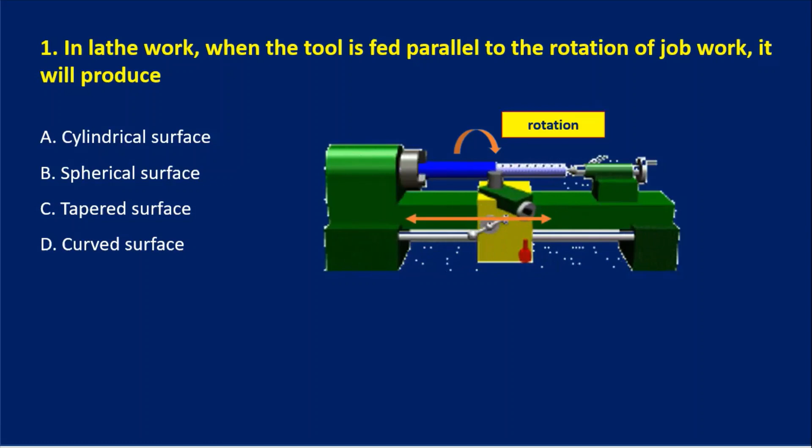Our first question: in lathe work, when the tool is fed parallel to the rotation of the job, it will produce what? If you see in this diagram, the tool is fed parallel to the rotation of a job, and in that case it will produce a cylindrical surface. So our answer is A, cylindrical surface.

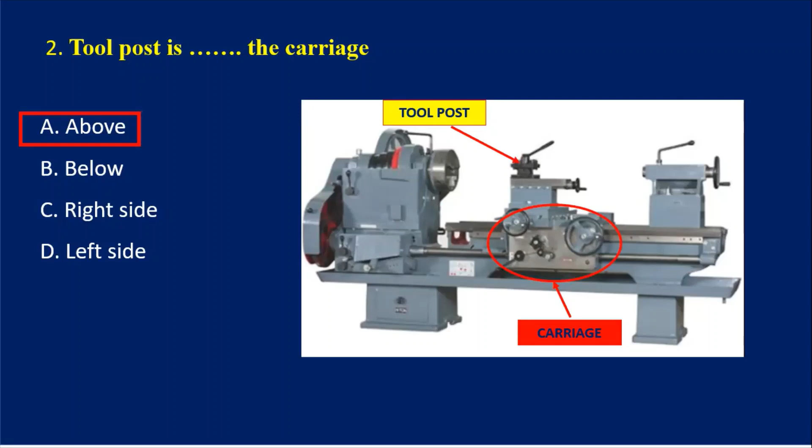Next question: tool post is dash the carriage. I show the lathe machine. From this diagram it is clear that the tool post is mounted over the carriage, meaning it is mounted above the carriage. So our answer is A, above.

Third question: workpiece is held in dash. I showed the first diagram, the three-jaw chuck. In a three-jaw chuck we mostly mount cylindrical components, while in a four-jaw chuck we mount or locate components other than cylindrical ones. This means that in the chuck we can hold a workpiece. So our answer is A, chuck.

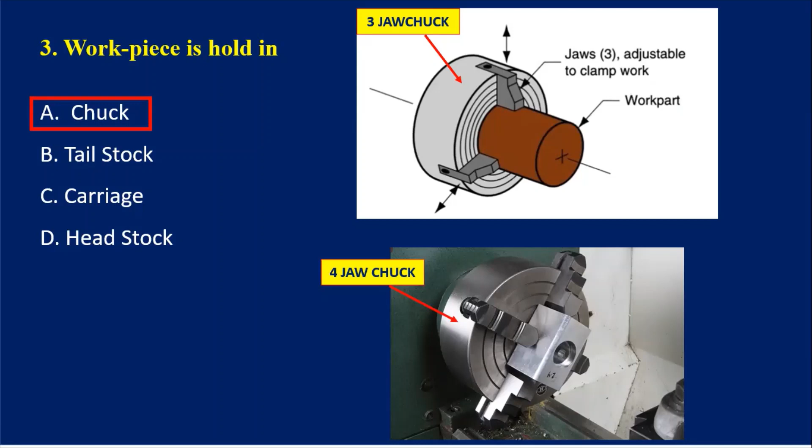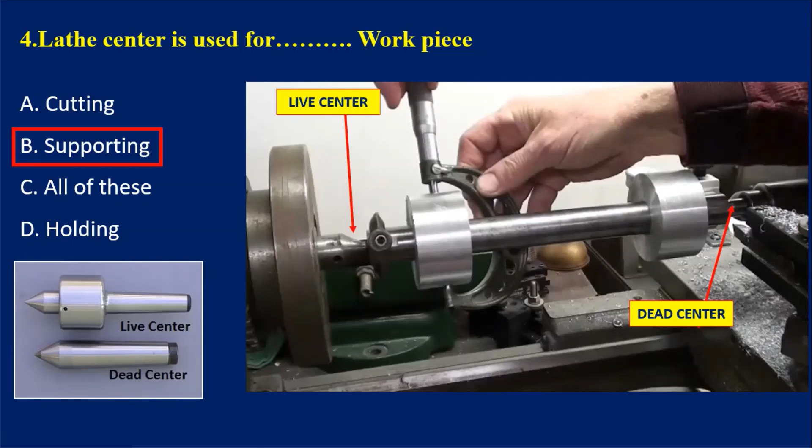Fourth question: lathe center is used for dash workpiece. As we know, there is a live center and a dead center. The live center is on the headstock and the dead center is on the tailstock. In this case, the workpiece is supported, basically the long workpiece is supported between the live and dead center. So our answer is B, the lathe center is used for supporting the workpiece.

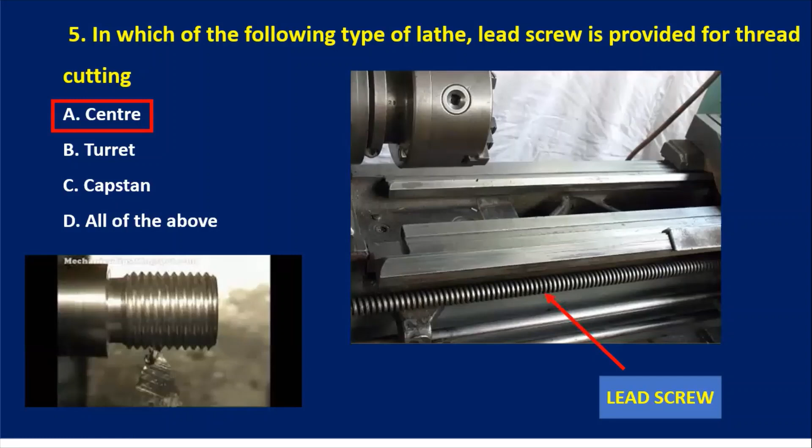Fifth question: in which of the following types of lathe is a lead screw provided for thread cutting? This means a threading operation has to be produced on the lathe machine. For that, I've shown a center lathe machine, and in the center lathe a lead screw is provided for thread cutting. In the turret and capstan lathe there is no lead screw because threading is done using a tap and die. So our answer is A, center lathe.

Next: when the tool face is ground sloped from the nose towards the rear end, it is called dash. I've shown again a single point cutting tool. This is the nose and this is the rear end of the tool. The tool face is ground to slope from the nose to the rear end. So the answer is positive rake angle.

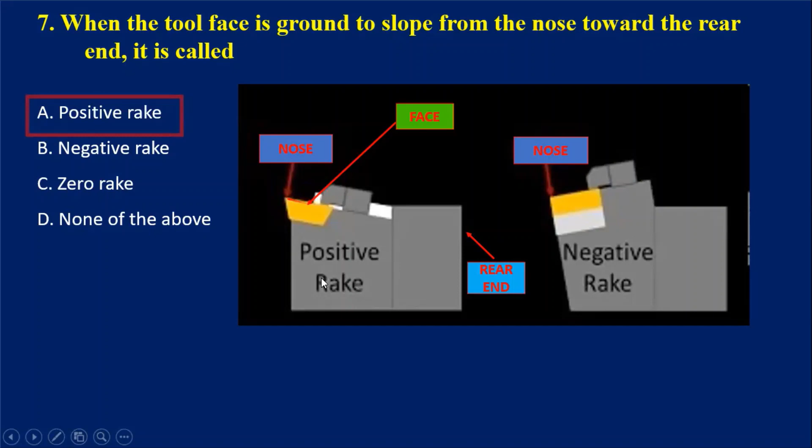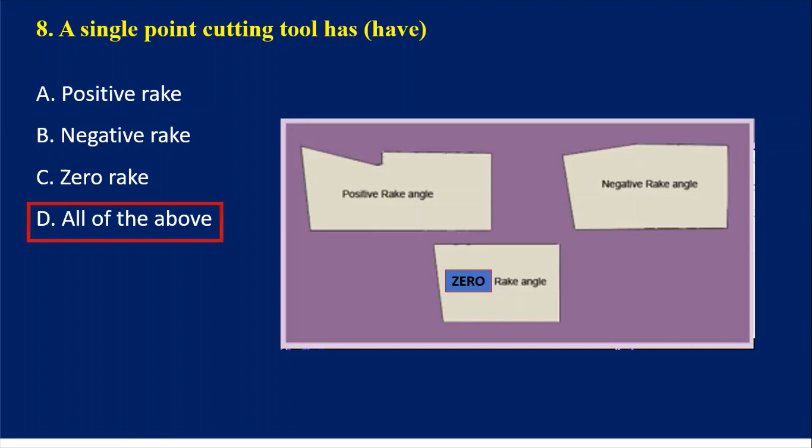Next question: a single point cutting tool has or have - you can see the three diagrams I've shown: positive rake angle, negative rake angle, and zero rake angle. This means a single point cutting tool can have all these rake angles, whether positive, negative, or zero. So our answer is all of the above.

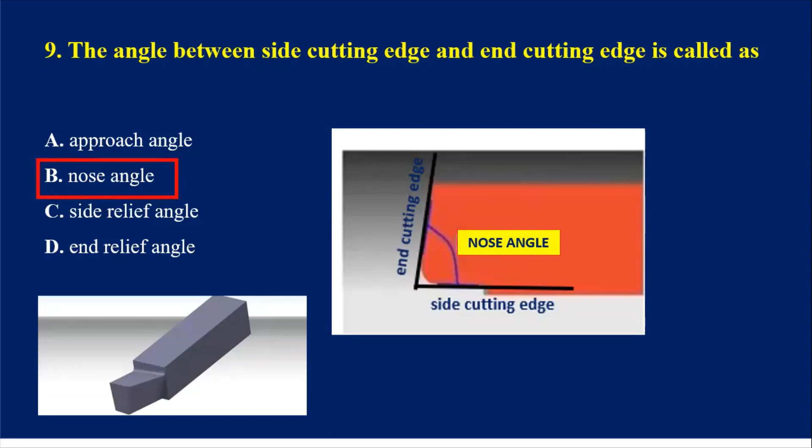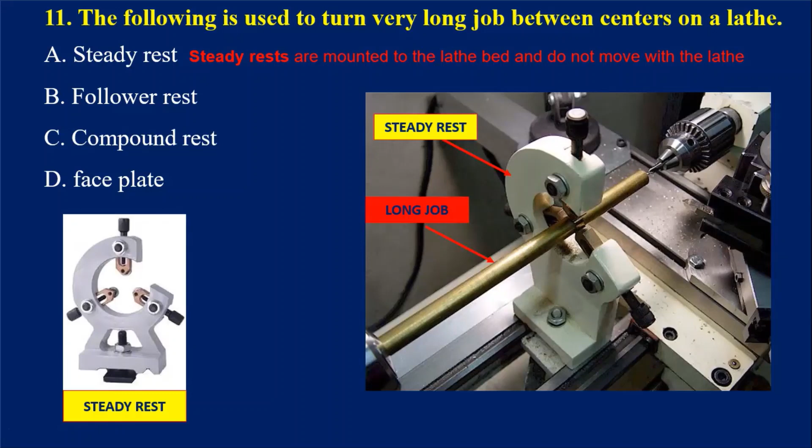Next: the following is used to turn a very long job between centers on a lathe. The answer is steady rest. This is a steady rest and this is a long job. This steady rest is mounted over the lathe bed and does not move along with the carriage. When the job is too long, the steady rest is used for supporting the job so that it can be turned easily between the centers. So our answer is steady rest.

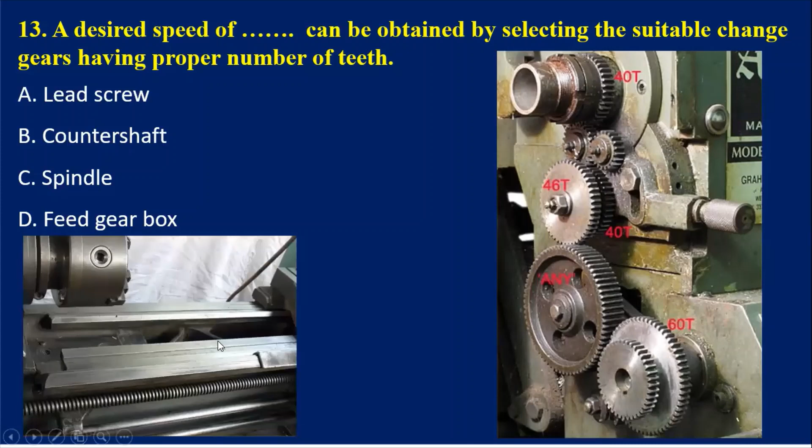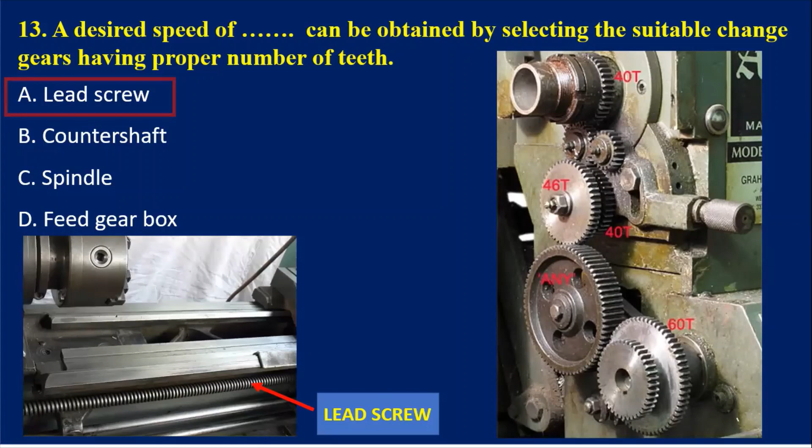A desired speed of dash can be obtained by selecting a suitable change gear having a proper number of teeth. This is the lead screw which I am showing in this diagram. We can change the speed of this lead screw by changing the gear which is located at the extreme end or extreme left side of the machine. Okay, so whatever speed we require can be changed by using the change gears, and for that our answer is the lead screw.

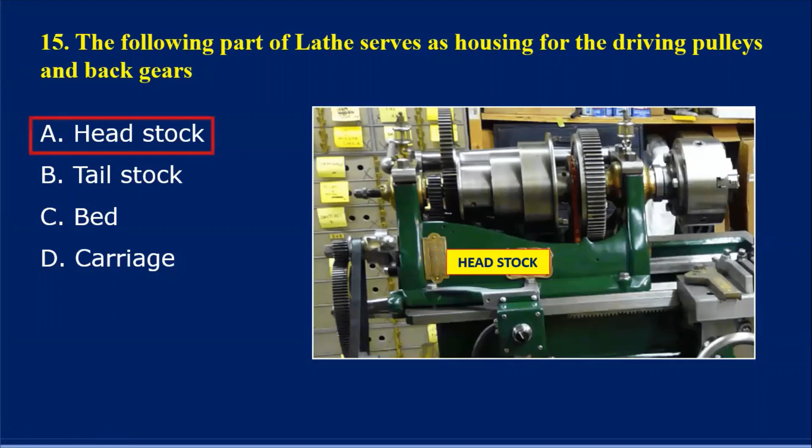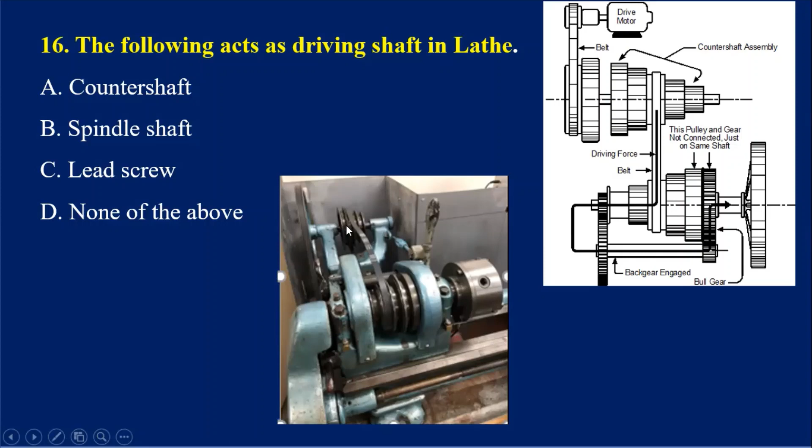Next, the following acts as driving shaft in lathe. Students, in a lathe machine, this is the counter shaft which will act as a driving shaft, and which is always parallel to the main spindle. And that's why our answer is the counter shaft.

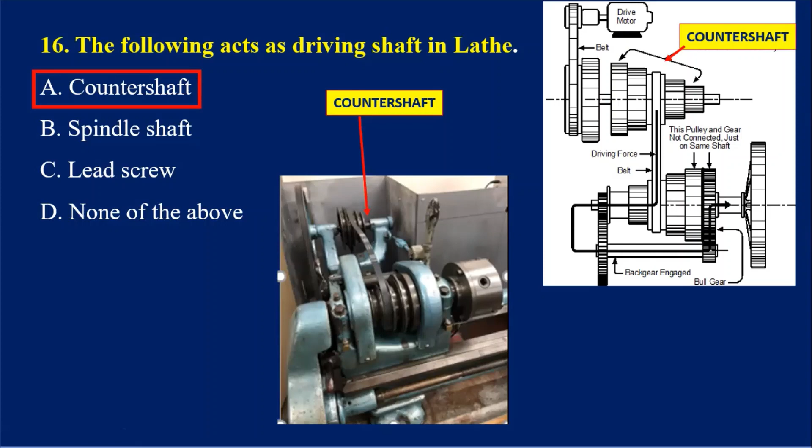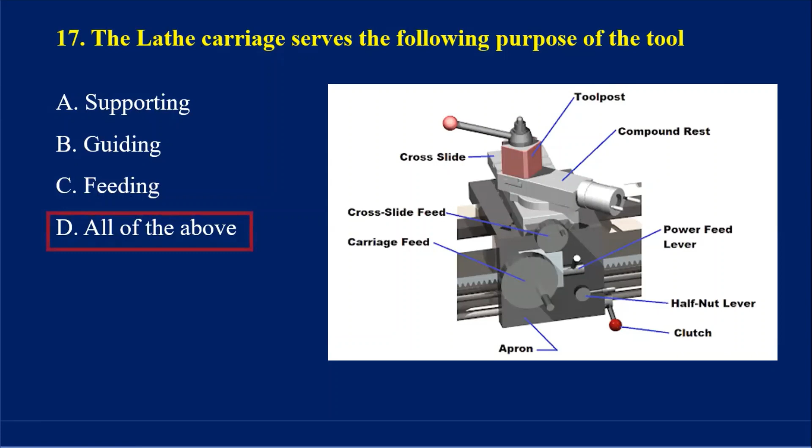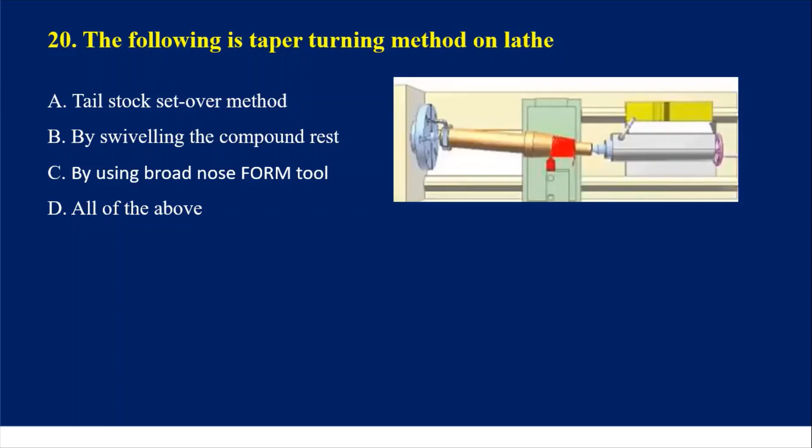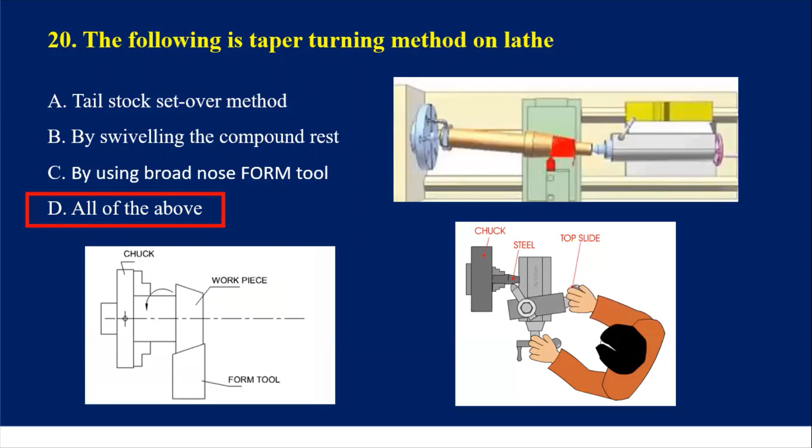The following is taper turning method on lathe. So students, this is the tail stock set over method, this is by swiveling the compound rest method. Then by using a broad nose form tool. It means that our answer is all of the above.

Next, in lathe, form tools are used to produce. Friends, if you see in this diagram, we can produce surfaces which are neither cylindrical nor taper. And that's why our answer will be B, the surface which is neither cylindrical nor taper. In that case, form tools are used.

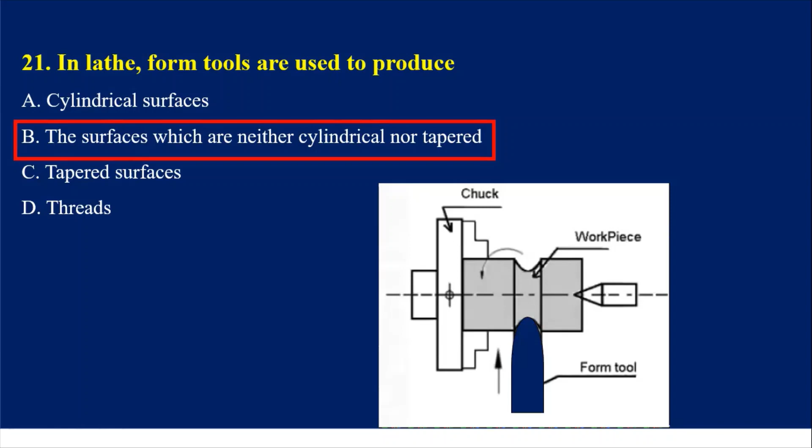A turret hexagonal tool post can accommodate dash tools. Here I have shown a hexagonal turret. Students, as you see, this is a top view of that. If the turret head is hexagonal, then I can locate 6 tools. If there is a square tool post, I can locate 4. So in this case, our answer is D, 6.

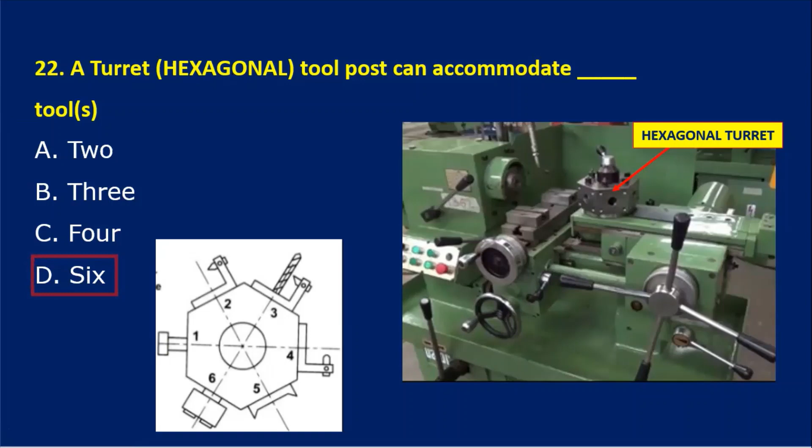Lathe bed is usually made up of. So you know that lathe bed is generally made up of cast iron to withstand the load of the headstock or a tailstock, carriage, etc. Also, the vibrations which are generated during the operations are damped out, and that's why our answer is C, cast iron.

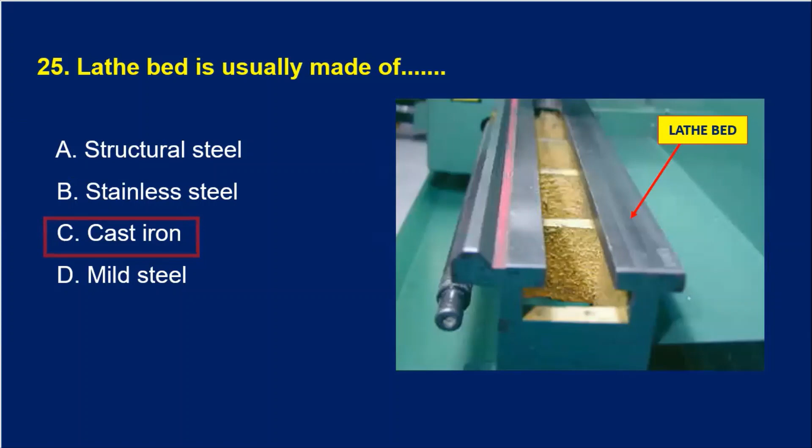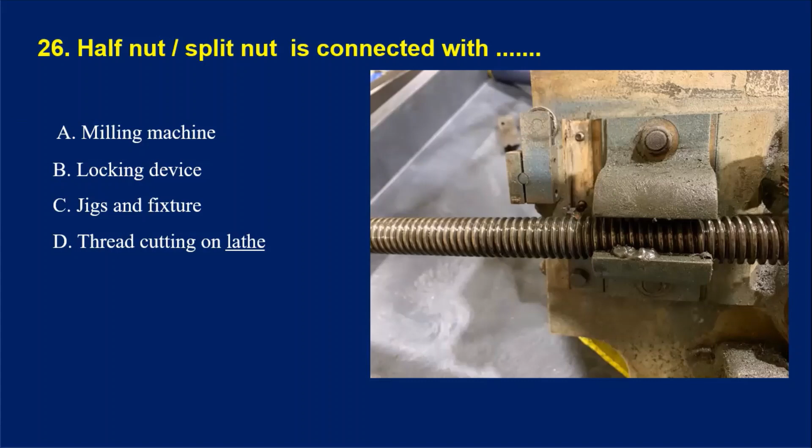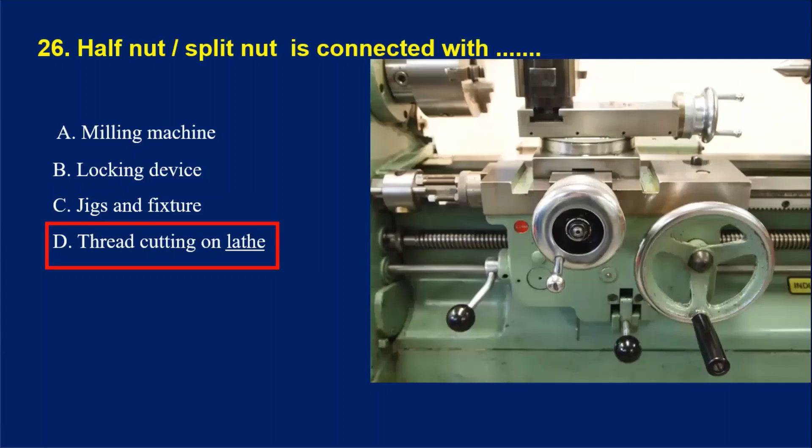Half nut or a split nut is connected with. So in this case, if you see this diagram, this is the half nut and this is the lead screw. So this half nut is used for thread cutting in a lathe. It engages or disengages the carriage with the lead screw, so that the rotation of the lead screw is used to transfer the tool along the workpiece to cut the threaded part. And that's why in this case, our answer is D, thread cutting on lathe.

Next question, in which of the following type of lathe very high skill of labor is required? Our answer is actually the center lathe, but I'll give an explanation of that. If I take the example of thread cutting, or if I compare the center lathe with the turret or a capstan lathe, the center lathe requires high skill as compared to the turret and capstan lathe, because thread cutting in the turret lathe is generally produced by taps and dies. So that's why our answer is the center lathe, where we require very high skill labor for doing any type of operation.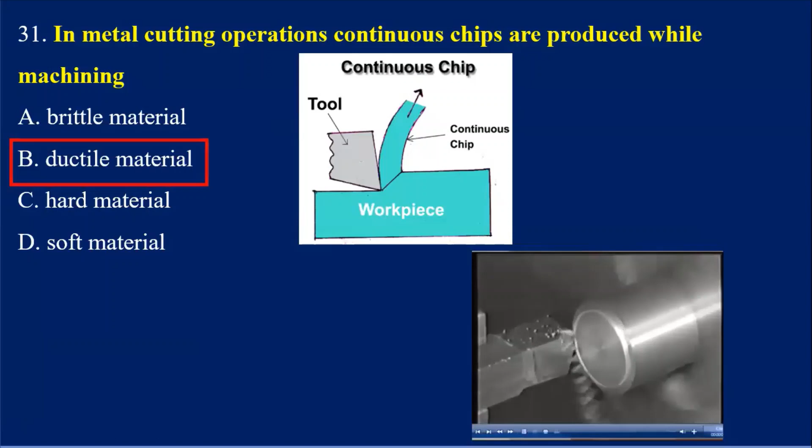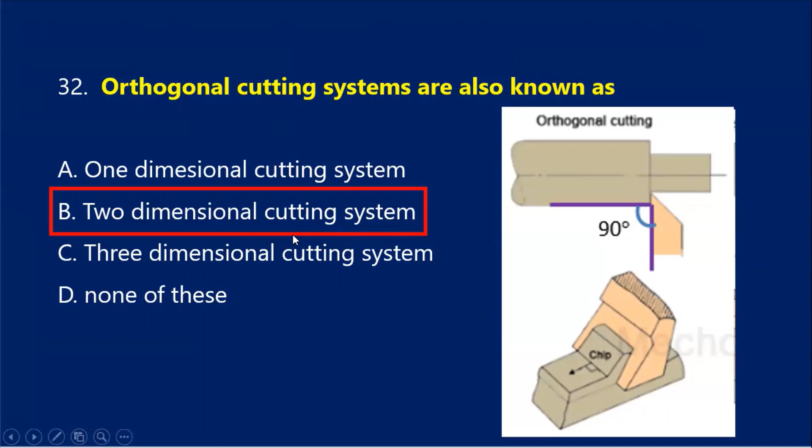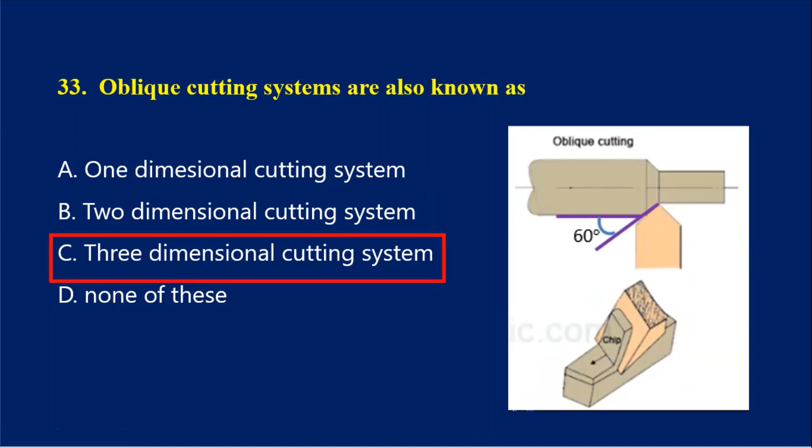Next, orthogonal cutting systems are also known as, basically, a two-dimensional cutting system. In orthogonal cutting, two forces are acting, that is the cutting force and the thrust force, and that's why it is called a two-dimensional cutting system. The next question is, oblique cutting system is also known as. Our answer in this case is the three-dimensional cutting system, because there are three forces acting, the cutting force, thrust force and radial force, and that's why our answer is C, three-dimensional cutting system.

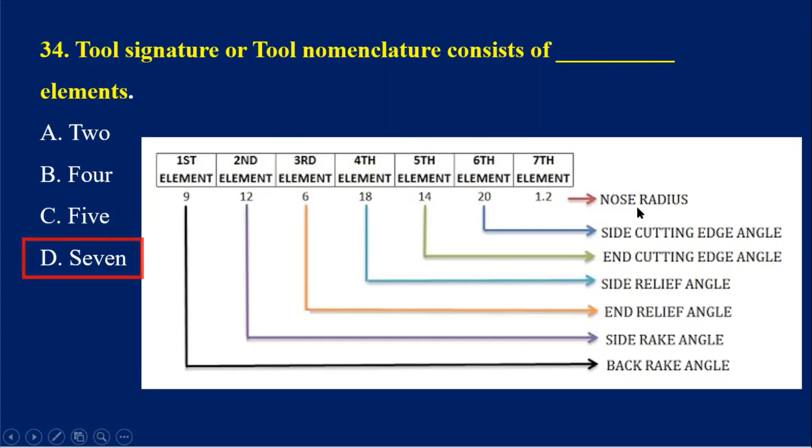Next, tool signature or tool nomenclature consists of dash elements. I've shown here there are 7 elements. The 7 elements you can see in this diagram are the back rake, side rake, end relief angle, side relief angle, end cutting edge angle, side cutting edge angle, and the nose radius. So in total there are 7 elements. That's why our answer is D, 7.

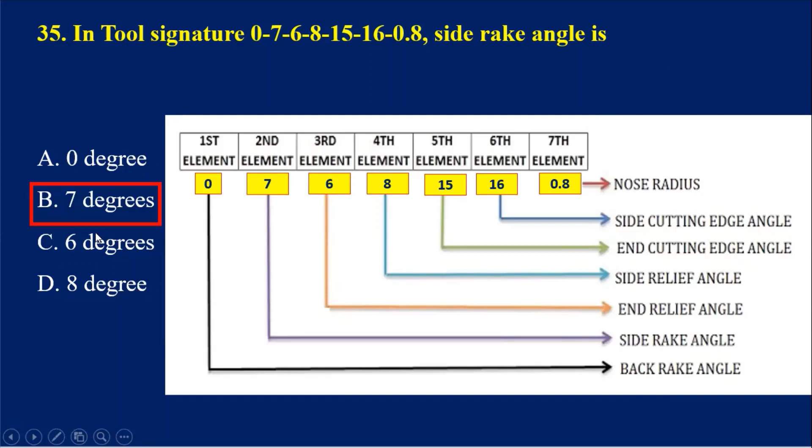Suppose they ask the end relief angle. In that case, the end relief angle is the third element, so your answer will be 6. This is a standardization which is done in the tool signature and you have to follow it. But in this case, the side rake angle is 7 degrees. So the answer is B, 7 degrees.